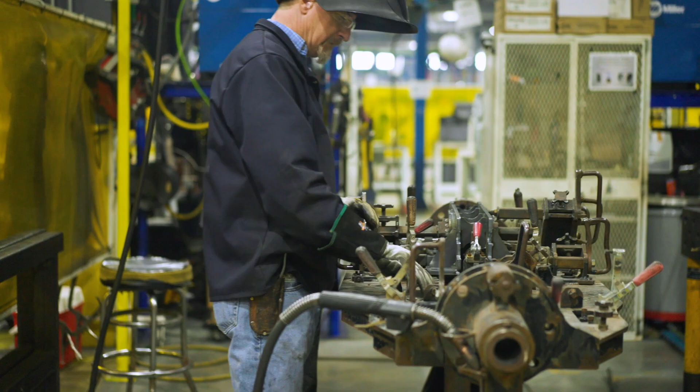A family name, a global brand, tough equipment, and at the center, people getting important work done. Welcome to Vermeer. Here, we design, build, and support industrial and agricultural machines equipping important work around the world.

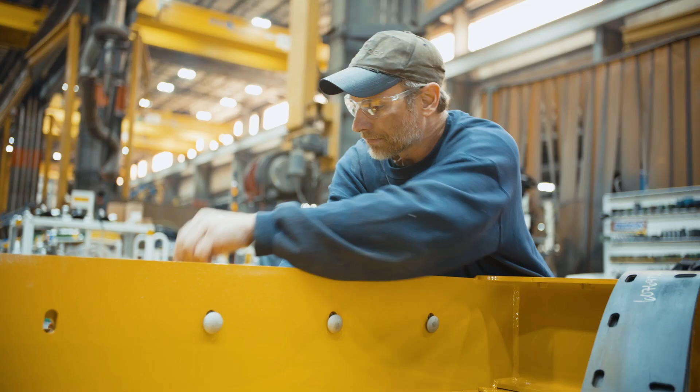This work takes a team of more than 4,000 worldwide, delivering tough yellow iron to a world striving to build better. Distributed through a global network of more than 600 independent dealer locations, our dealers deliver confidence to our customers, taking on job after job after job.

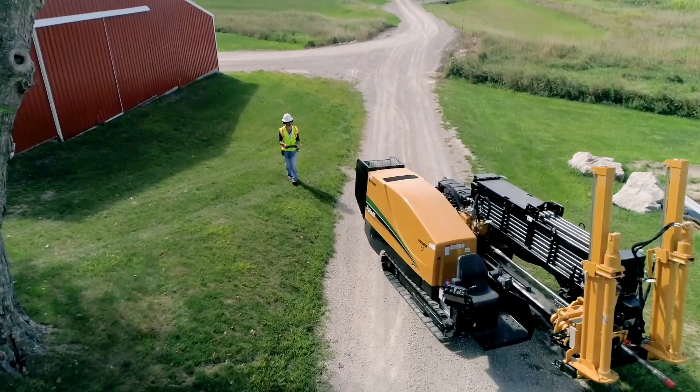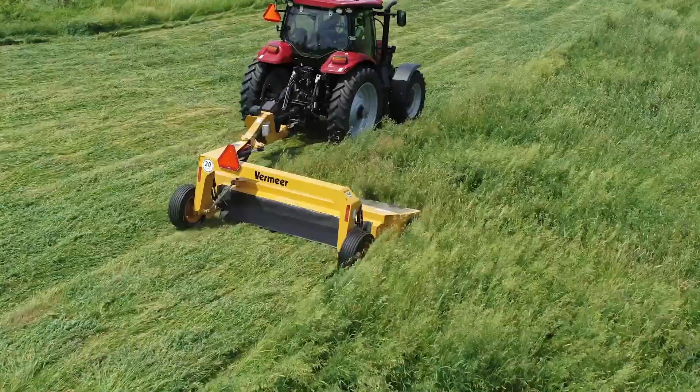And these jobs matter. Connecting people to the daily necessities of life, managing natural resources, and feeding and fueling communities. This is Vermeer, the result of decades of hard work, innovation, exploration, investment, and ultimately equipping others to do more.

It started in the 1940s. America entered World War II, and while the war took place overseas, back in America, farmers worked tirelessly in the fields with a depleted workforce, many of them still relying on horse-drawn implements and manual labor.

In his early 20s, Gary Vermeer worked on his family's farm. He was a tinkerer, an innovator, always looking for a better way. In 1943, Gary built a mechanical wagon hoist to eliminate the back-breaking work of unloading corn. Word spread quickly, and soon neighboring farmers wanted one of their own. And that's how it started.

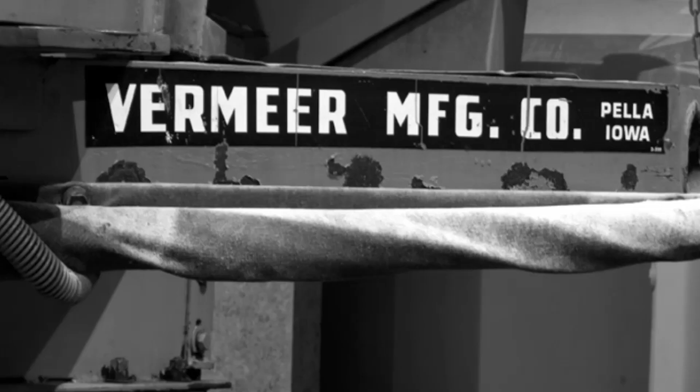Gary, alongside his cousin Ralph Vermeer, started Vermeer Manufacturing Company on November 22, 1948. Vermeer was now more than a name. It was problem-solving equipment, manufactured in a cinder block building on the edge of Gary's hometown in Pella, Iowa. Gary's brother Harry Vermeer would join in 1950.

The team was building more than equipment. They were building a brand that would become globally recognized for impacting lives around the world.

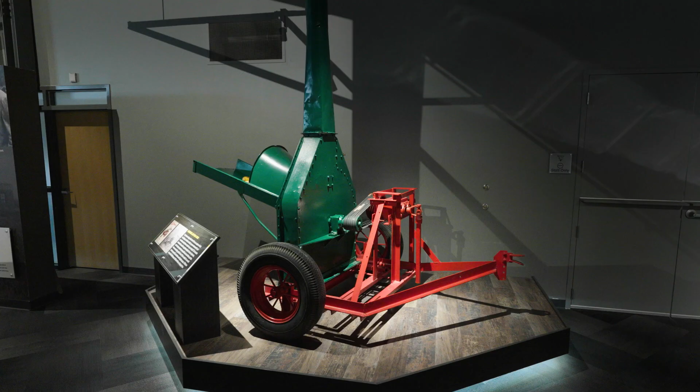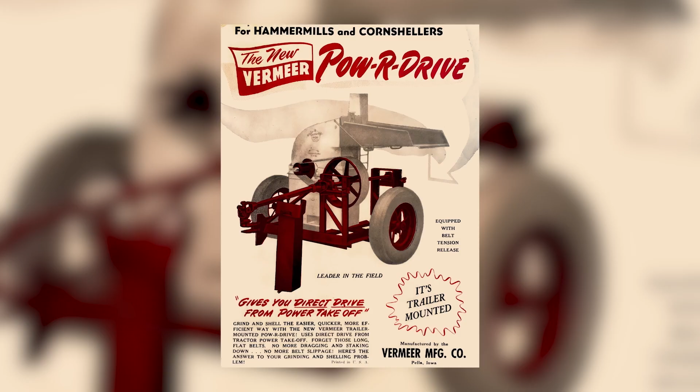The first commercial success for Vermeer came a year after its founding in 1949. The Pow-R-Drive used a system of belts connected to a tractor's power takeoff to run hammer mills and corn shellers. It helped make work on the farm easier.

And you know, I put a little ad in the Wallace's Farmer, and we had a little box in the post office, and they brought these inquiries out with the bushel baskets. We had 1,000 inquiries in 1 week, and I had one man working for me.

Gary's spirit of innovation and problem solving guided the company's success as the mantra became: find a need, fill that need, with a product built to last, and simply build the best.

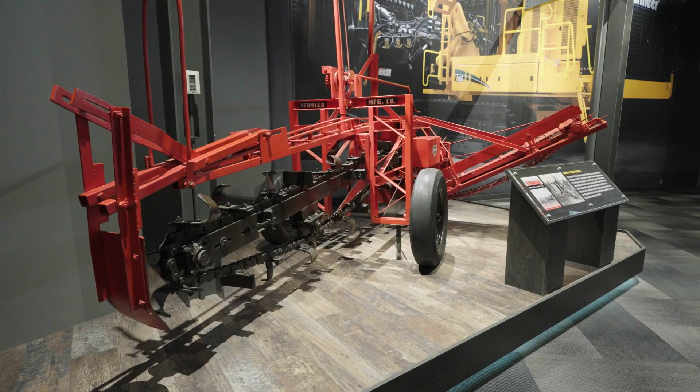Building on the success of the Power Hoist, Gary introduced Vermeer's first product in its infrastructure line in 1951. The problem? How to better install tile to drain low-lying farm fields too wet for crop production. The solution? A machine to dig the trench.

The Power Ditcher was a trencher powered by a tractor's PTO and made tile installation less labor-intensive, helping farmers get more done in their day.

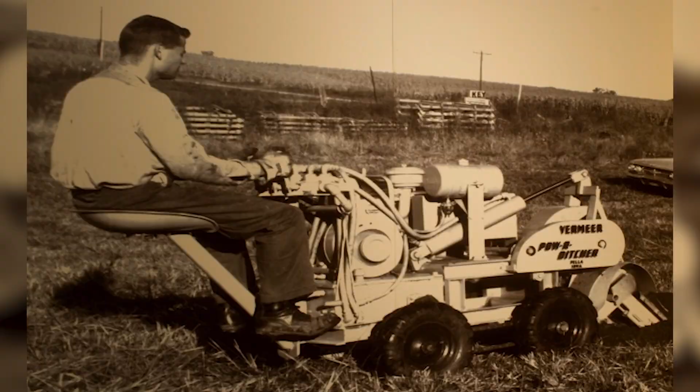From the original tiling trencher evolved self-propelled, track-mounted power ditchers for the underground utility market. And in the late 1950s, Vermeer began to export these trenching machines overseas. Vermeer was now a global brand.

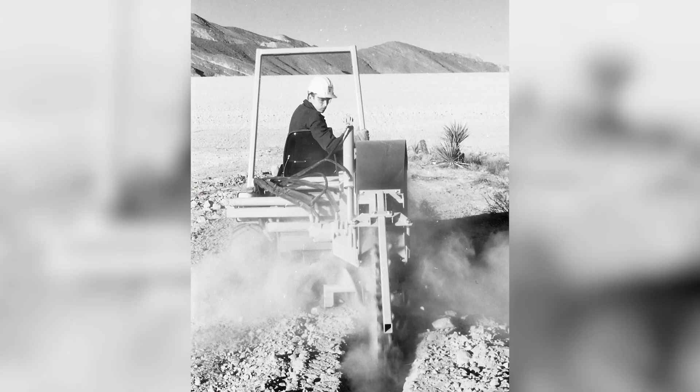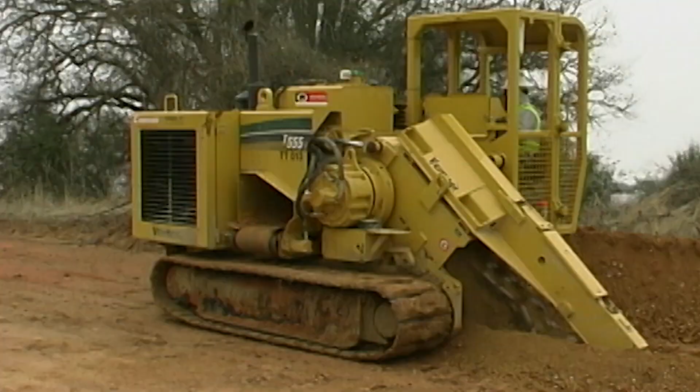And just like that, Vermeer was entrenched into infrastructure markets, innovating and manufacturing a long line of products dedicated to changing underground infrastructure around the world.

After 3 decades, this little company had grown to nearly 1,000 team members as other areas of the business grew as well, tripling in size just 2 decades after that.

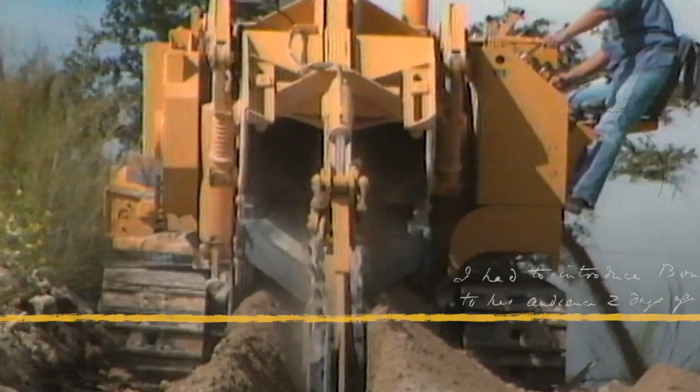By the 1980s, Vermeer tapped into the advancing technology of hydraulics, and a new line of trenchers were introduced. As jobs got bigger and tougher, so did the trenchers. Today, trenchers operate in ranges from backyard pedestrian use to large installations of fiber, gas, power, water, sewer, and under-drain installation.

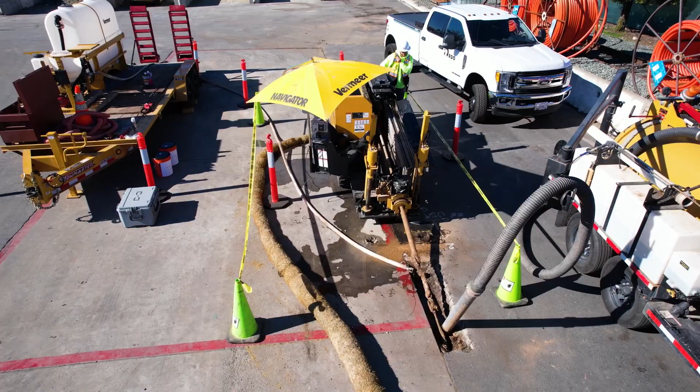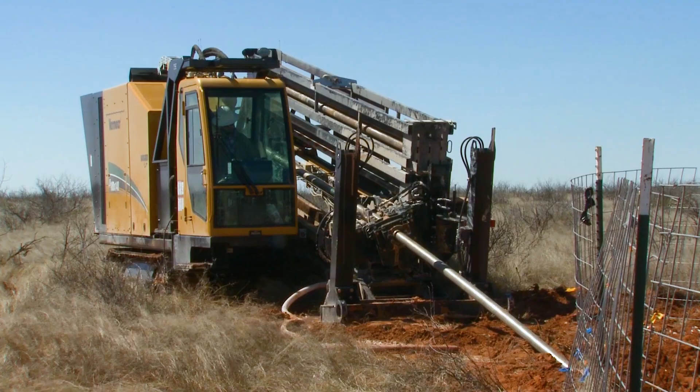In the 1990s, infrastructure installation was changing. The challenge? Install utilities with minimal disruption to existing infrastructure. The solution? Horizontal directional drilling, a technology that allows utilities to be installed underground, going under roads and even bodies of water to make necessary connections. As jobs got tougher, the drills got stronger.

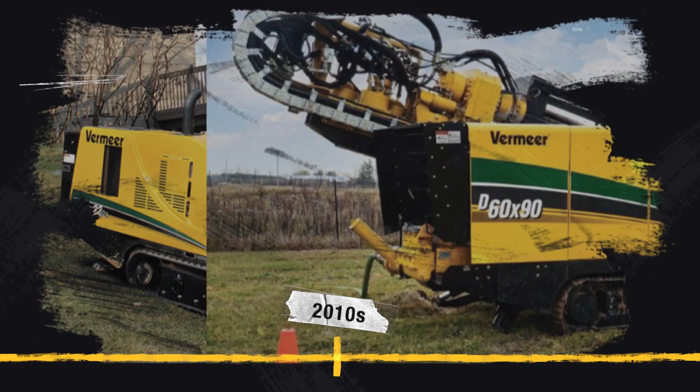Vermeer led the industry with innovations in its HDD lineup to make an impact on customers' productivity. Standardized controls, sound reduction, the ability to drill through rock, and power to footprint all help Vermeer customers take better care of the communities they work in.

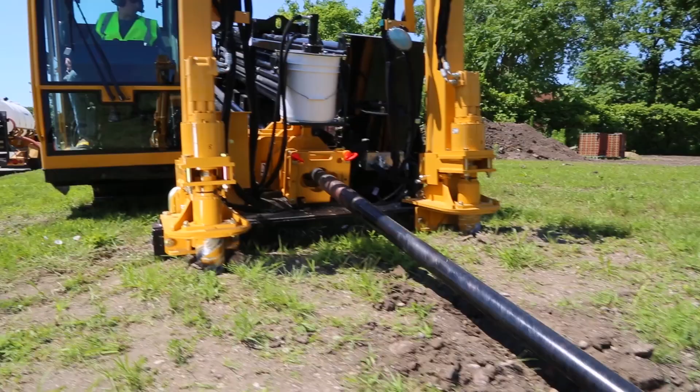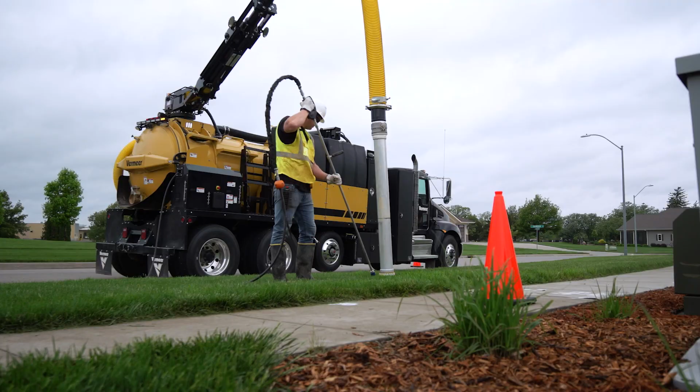And often on HDD job sites, vacuum excavation equipment can be seen partnered up to soft dig and visually verify the location of existing buried utilities, driving productive and responsible ways to go underground. Vermeer MV Solutions in South Carolina and Florida manufacture a long line of Vermeer truck and trailer mounted vacuum excavators, supplying a growing industry.

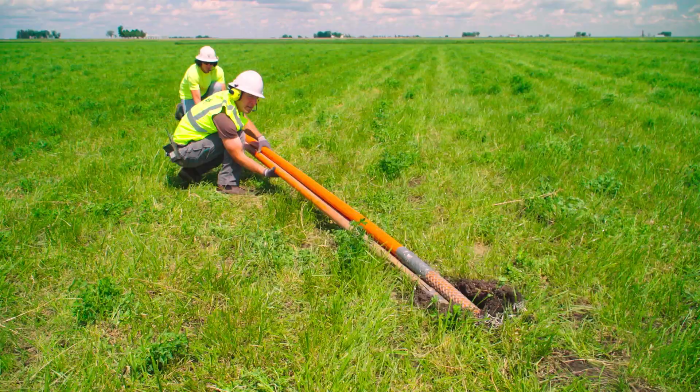Along with increased demand for underground work, so came demand for drill operators to run the machines. In 2015, Vermeer launched the HDD Circuit Training Program, the first accredited certificate course of its kind, providing a comprehensive HDD operator training program teaching efficiency and expertise.

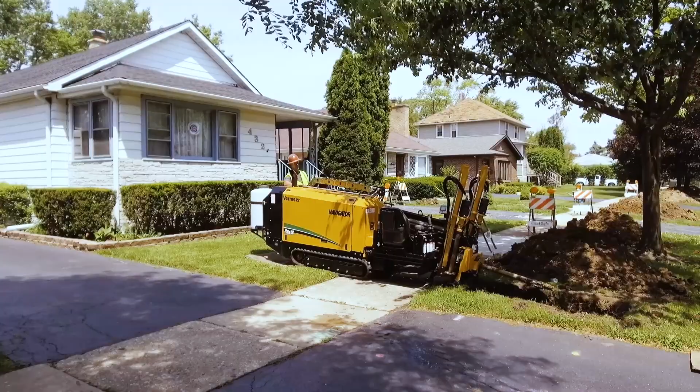Today, Vermeer helps deliver confidence to job sites around the world with equipment that connects people to water, power, gas, and high-speed internet, alongside technology that helps drive productivity.

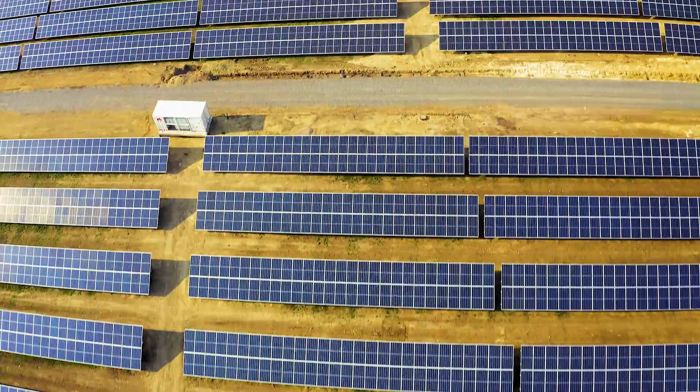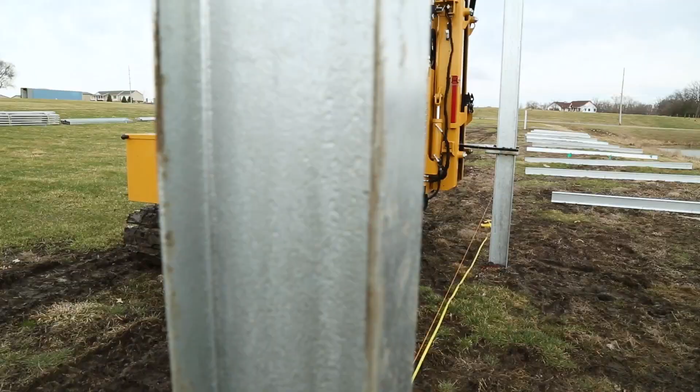While solar contractors were using Vermeer equipment to connect solar farms to utility grids, Vermeer saw an opportunity to add productivity to the job site. In 2011, Vermeer entered the renewable energy market with the launch of the PD10 pile driver, allowing customers to utilize the same local dealer support for their operations. Vermeer pile drivers meet the demands of solar contractors with different size models, automation features, and flexible operation, helping complete important work and manage natural resources.

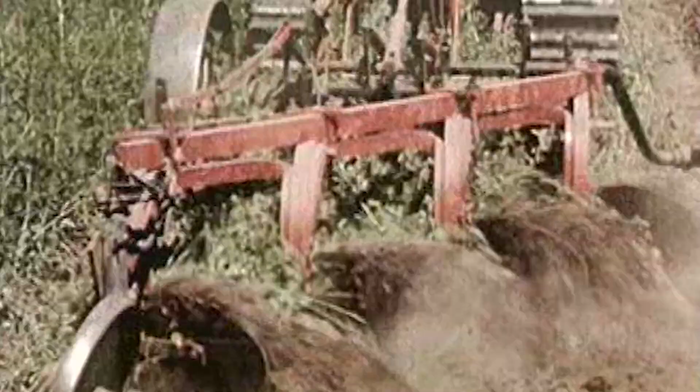Just as Vermeer's infrastructure line grew from a need on the farm, so did its environmental product line. In the late 1950s, Gary needed to clear trees from his fields for crop production. The challenge this time, a tree stump. There was really no way to take a stump out of the ground except with an axe and a spade. It was almost impossible. He found a better way.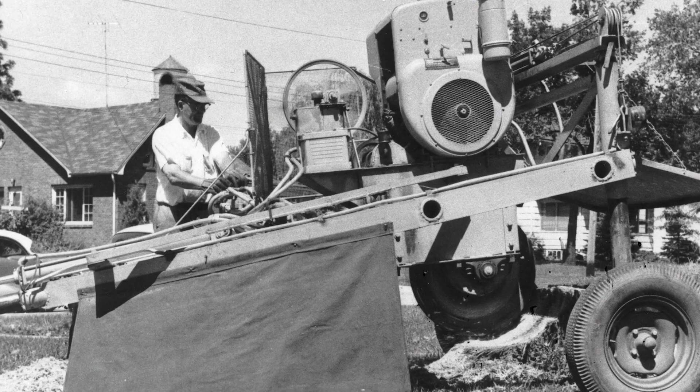Vermeer's stump cutter ushered the company into the environmental tree care market.

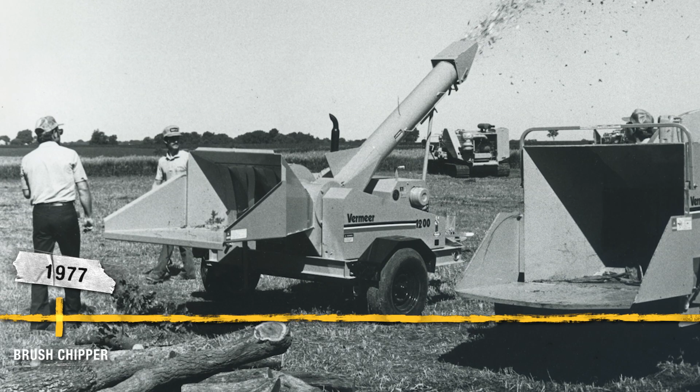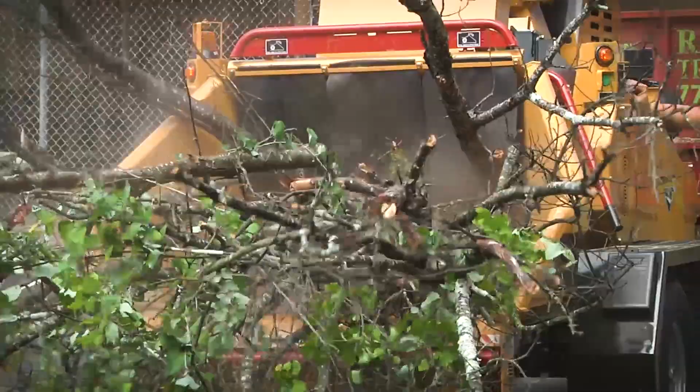Vermeer's success in the environmental market was just getting started when towns and cities needed a way to clear trees and brush in their communities. This led to the creation of Vermeer's first brush chipper in 1977. Then, by 1990, brush chippers were in high demand and became the best-selling product at Vermeer. As demand grew, different sizes of chippers helped tackle a variety of tough jobs. Larger limbs and thicker brush made it difficult for operators to load material by hand.

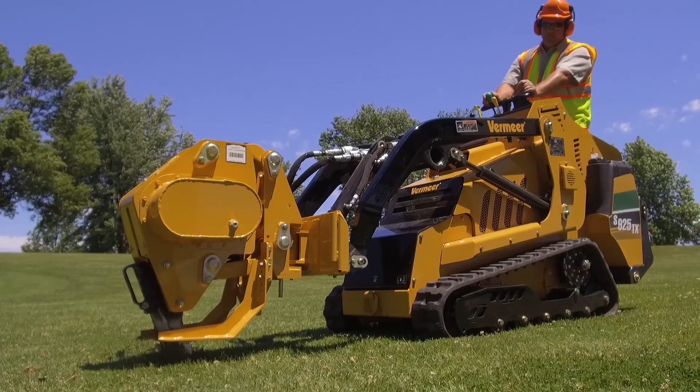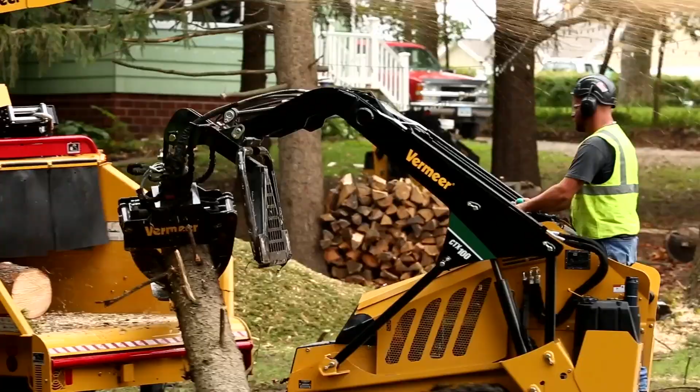This led engineers to rethink how the Vermeer skid steer, originally produced for construction markets, could better serve the tree care, rental, and landscape market customer. Today, many skid steers can be seen on job sites loading materials into brush chippers and serve as a versatile tool for many job sites, thanks to a wide variety of attachments.

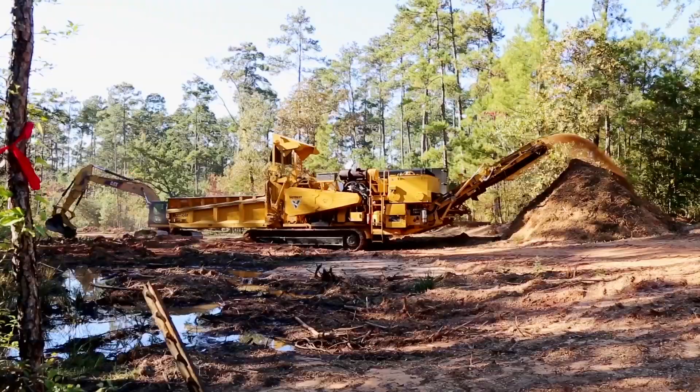Environmental-related work, such as storm cleanup, right-of-way clearing, and new regulations, laid the foundation for bigger work ahead.

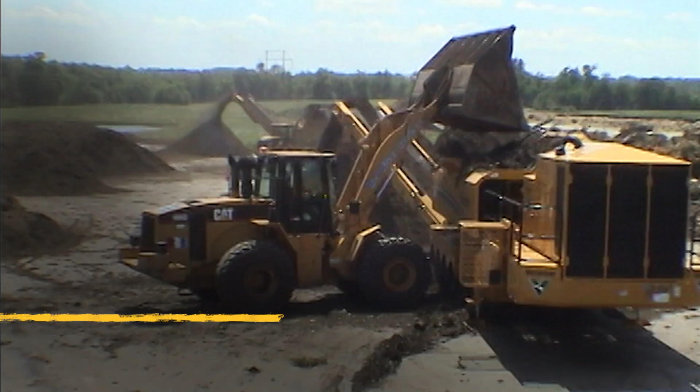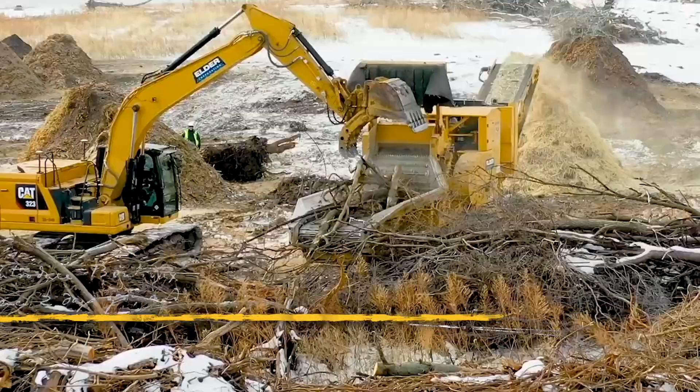Regulations in the 90s across North America left few options for tree care businesses to dispose of stumps and large diameter wood. Landfills began turning away wood waste, and local communities enacted burn bans. Tree care businesses turned to Vermeer for a solution. In 1994, a line of tub grinders was manufactured for high-volume material processing, but better ways were needed to handle even larger materials. So in 2002, the horizontal grinder was developed to help contractors dispose of whole trees and more efficiently manage waste.

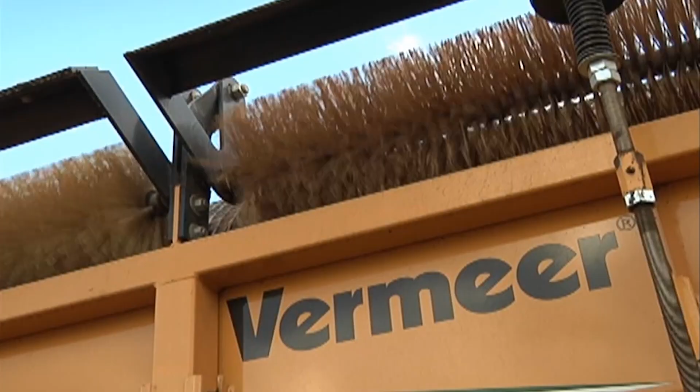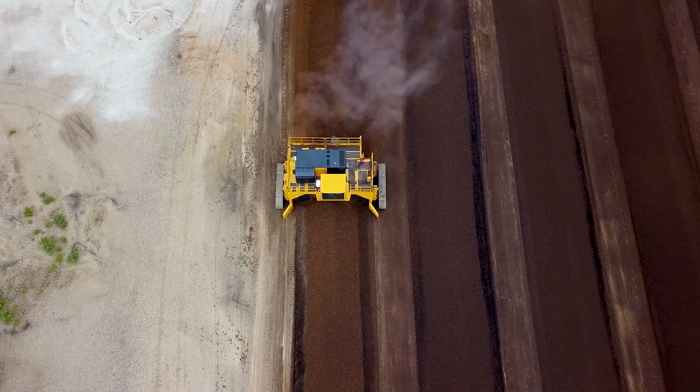And in some cases, turned back into energy as Vermeer supports the renewable energy markets with biomass. Acquisitions and product innovations cemented the presence of Vermeer in the recycling and forestry market. Today, trommel screens, whole tree chippers, horizontal and tub grinders, along with many industry-leading innovations, can be found on recycling and forestry job sites.

At the same time, Vermeer was finding more ways to help manage environmental resources. In the early 2000s, an Italian customer needed to mine minerals from an area where traditional methods of drilling and blasting would not work. The solution? A more controlled method of mining.

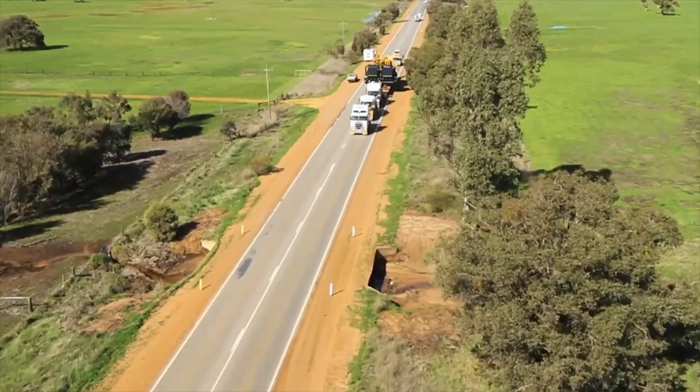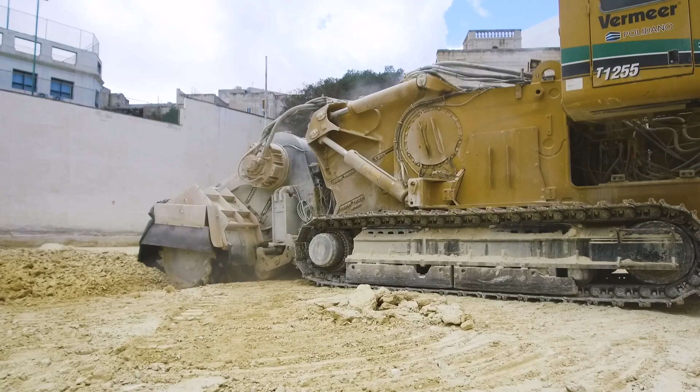Then, in 2011, Vermeer unveiled the T1255 Commander 3 terrain leveler surface excavation machine. It's the largest machine manufactured in Iowa then and still is today. Surface miners use high-precision excavation and are designed to work in tough ground conditions. They extract minerals needed for everything from iodine to aluminum and can be found in quarries, mines, and even cities.

By the 1970s, work on the farm was getting done, but some jobs were taking a toll on an aging generation. Farm implements helped make the work easier, but putting up hay was still a labor-intensive job.

Then, during an early morning walk between Gary and his friend, their conversation would lead to a transformation of the hay industry. His friend wanted out of raising cattle. The work was just too much. He said, 'I'm tired of putting up hay.' And I thought, if this fella who ought to be in the cattle business is tired of putting up hay, there ought to be a better way to do it.

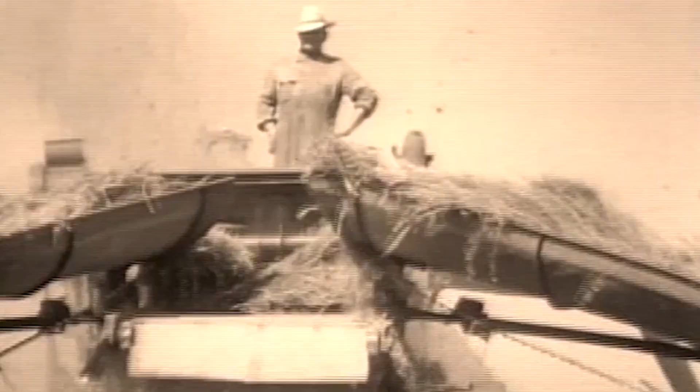So the next morning, I went to the experimental department, and we started figuring out how it would be to make a bale that would weigh a ton. And so then we started building that.

And then I went to 10 county seat towns in southern Iowa. You know, it's all cow-calf operation. They came out by the hundreds. Those cars would back up a mile on the road. And people would come in there because, boy, they were ready for something better as far as haying was concerned. So we made those demonstrations, and the next day you'd see a lot of the same people there again, and you'd say, 'Well, how come you came again?' 'We want to see if it works two days in a row,' they said.

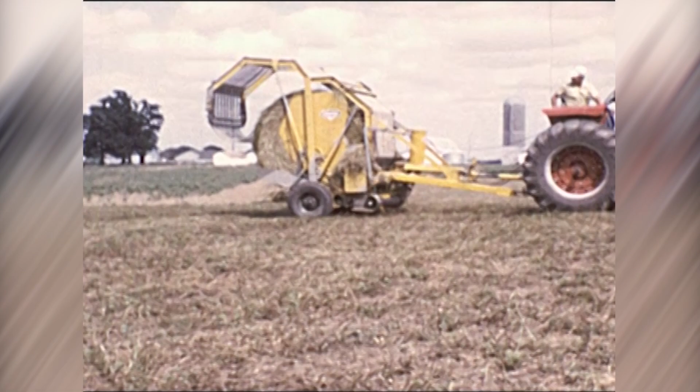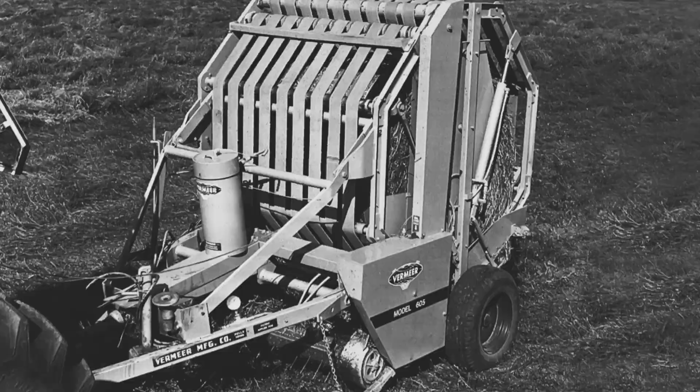Almost overnight, the large round hay baler revolutionized haymaking and Vermeer. The company doubled in size. Orders for balers stretched manufacturing production and capacity to the limit. Three new manufacturing plants were constructed in just nine years. Throughout the years, new balers were introduced with mechanical and technological improvements, helping meet the needs of customers with balers of different sizes and capabilities.

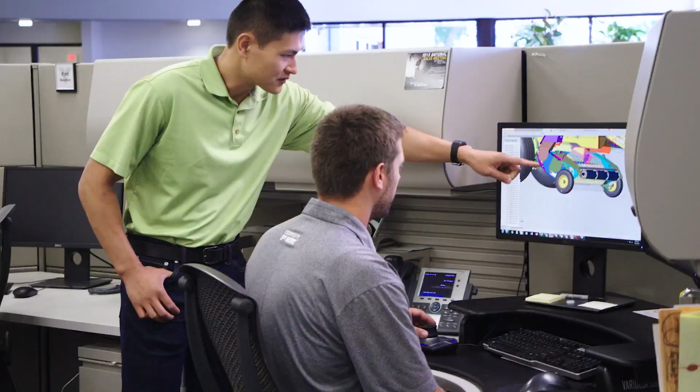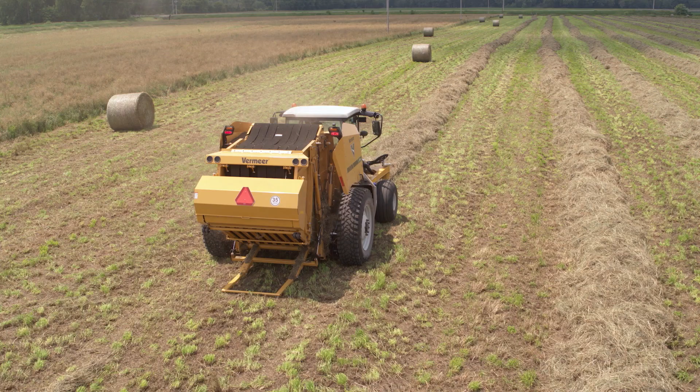Innovating didn't stop, however. Productivity and operator comfort continued to be a priority. In 2017, Vermeer launched the ZR5 1200 self-propelled baler, an all-in-one machine, efficiently moving through the field and comfortable for the operator. In 2021, CEO Jason Andringa commemorated 50 years of the round baler by using the ZR5 to successfully complete 50 bales in just 50 minutes.

And to do it on this land that has so much family history, going all the way back to the invention of the baler, is something I'll never forget, to be able to celebrate the 50th anniversary of the baler.

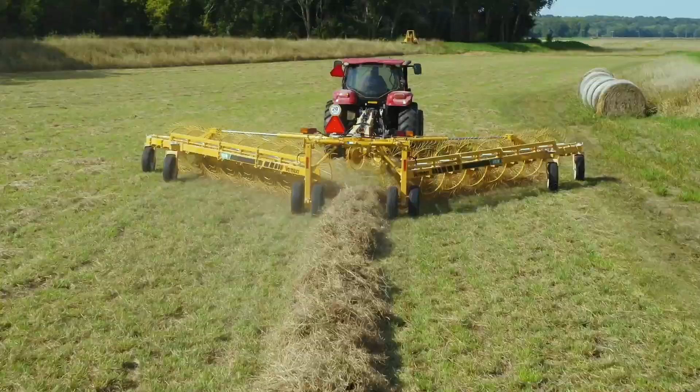Today, Vermeer continues to lead the forage industry with concepts like automated baling assistance technology on self-propelled balers and an autonomous bale mover. Vermeer forage solutions include a complete haymaking product lineup with mowers, rakes, tedders, bale wrappers, bale processors, vertical mixers, and feed wagons.

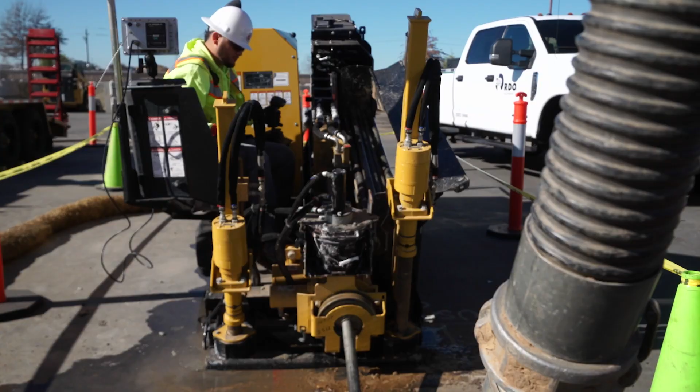Vermeer is a global brand today, following its humble beginnings on the farm. Customer loyalty grew thanks to the innovative products that help customers complete important work, and also because of the sales, parts, and service support delivered by a robust dealer network.

In the beginning, dealerships were started by Vermeer team members leaving Pella to establish territories. The first of these began in Findlay, Ohio in 1960, fanned out across the United States, and then around the world. Today, Vermeer has over 500 agricultural dealer locations and 200 industrial dealer locations, delivering confidence to customer job sites.

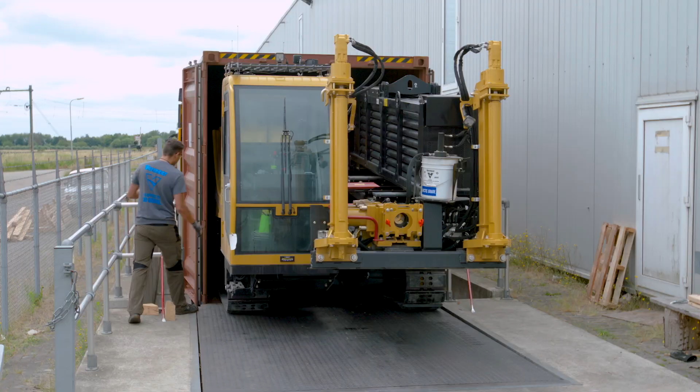Diverse products and markets require a diverse dealer network, demanding expertise that understands the culture and needs of the regions where customers live. To strengthen this localized support, Vermeer has manufacturing facilities and regional offices located in both domestic and international locations, strategically dotting the map.

Vermeer has evolved from a one-man shop into a globally recognized brand, owned and led by first, second, and now third-generation family members. Gary Vermeer believed in finding better ways, listening to ideas, and empowering curiosity. After founding the company, Gary remained CEO until 1989.

Gary's three children, Stan, Bob, and Mary, later joined their father in the family business: Stan from 1975 to 1986, Bob in 1974, and Mary in 1982. Bob and Mary's leadership in the 80s spearheaded the 4P philosophy of principles, people, product, and profit, a definition of the company's culture that still serves as the foundation for business decisions today.

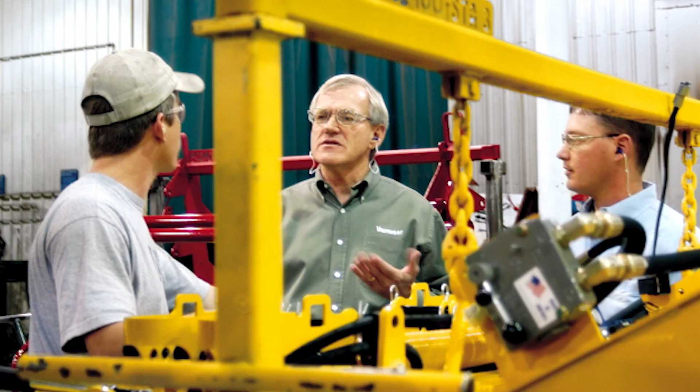Bob Vermeer, second-generation family member, took over as CEO in 1989, remaining in the role for the next 20 years. Bob's vibrant passion for people played an important role in creating a caring culture, demonstrating how to live it out in work, in life, and for others.

I always enjoyed the people part of the business and really love to see people grow in their positions. They're encouraged to improve themselves, find out where their giftedness is and what they can add to Vermeer. And I think that goes back to the 4P philosophy, and hopefully we have modeled that as a family for all the people who are here.

In 2003, Bob shared the CEO title with his sister, Mary Andringa. From 2003 through 2009, Bob and Mary guided the company based on the heritage of their father with a vision for the future.

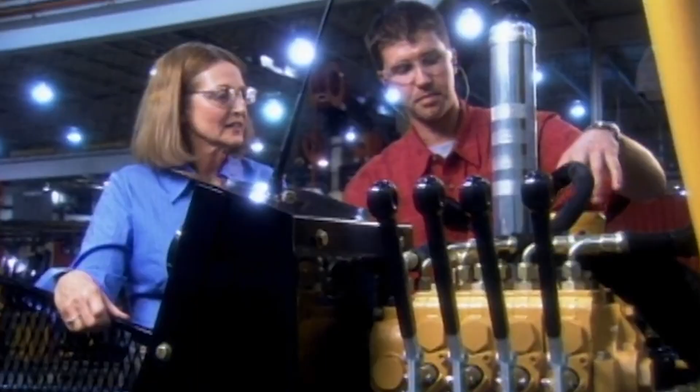Mary became the sole CEO in 2010 as Bob transitioned to chair of the board. Under Mary's leadership, Vermeer experienced increased productivity in the plants with the adoption of lean manufacturing methods, and emphasized workforce development by attracting young talent into the manufacturing industry.

Continuous improvement really is taking waste out of the system. We always want to leave the value added in the process, but there are so many things that are non-value added. And if you can reduce or eliminate those, that helps you be a lot more productive. And it has enabled us to be profitable, but also be able to reinvest back into the business.

Mary served as CEO from 2010 until 2015, when her son, Jason Andringa, took over. Following an intentional succession plan within the business, Jason was ready to continue Vermeer growth.

Of the 4 Ps, principles are at the center, treating other people like you would want to be treated yourself. And I think that's an incredibly important theme throughout Vermeer's history. I feel like my grandfather operated that way. My mother operated that way. Both my uncles operated that way. It's been part of our history for 75 years, and there is no way we will deviate from that at any point in the future.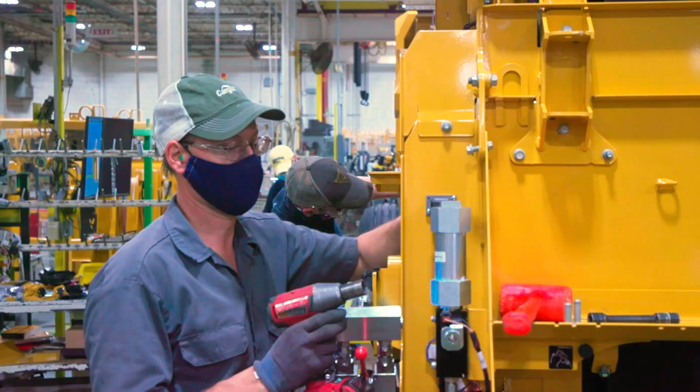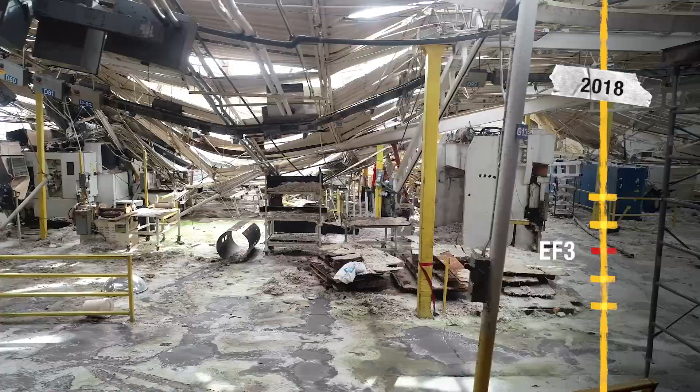Jason, a third-generation family member, has led Vermeer through some of the most successful and profitable years in company history, but has also experienced significant challenges too. In 2018, an EF3 tornado hit Vermeer headquarters in Pella, Iowa, causing major damage to plants 5 and 6. Fortunately, only minor injuries occurred, and everyone on campus was safe and accounted for.

With 400,000 square feet of manufacturing space demolished, Jason would lead the way. We are going to come back better and stronger than ever before, no doubt about it.

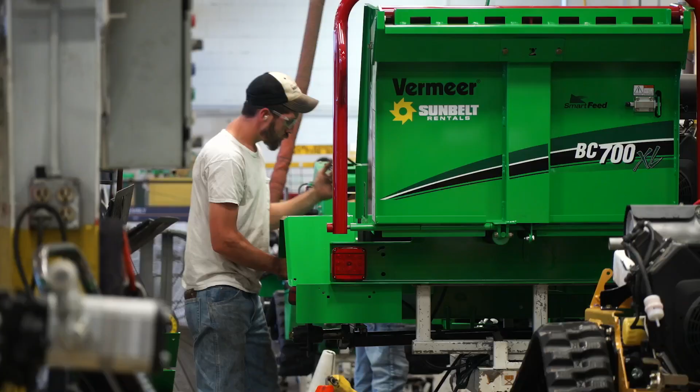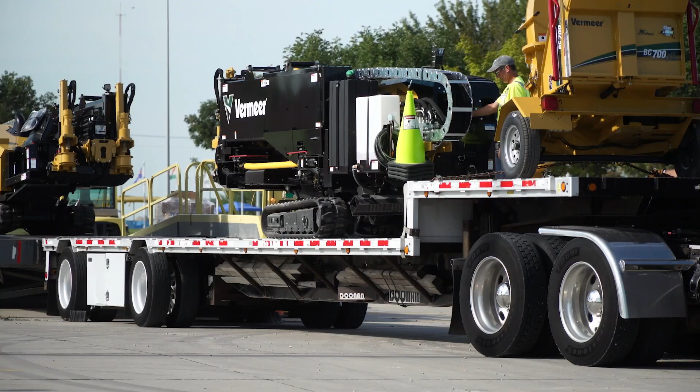Vermeer Strong became the rally cry, and the team proved to be exactly that. Strong, passionate, ready to rebuild for a better tomorrow. 30 days after the tornado, all team members were back to work and production was fully operational.

New construction began shortly after, and Shop 48, a building dedicated to innovation, opened in October 2019. The Eco Center, a hub to responsibly process waste, opened in February of 2020. And Plant 7, an all-new state-of-the-art manufacturing facility, opened in November of 2020.

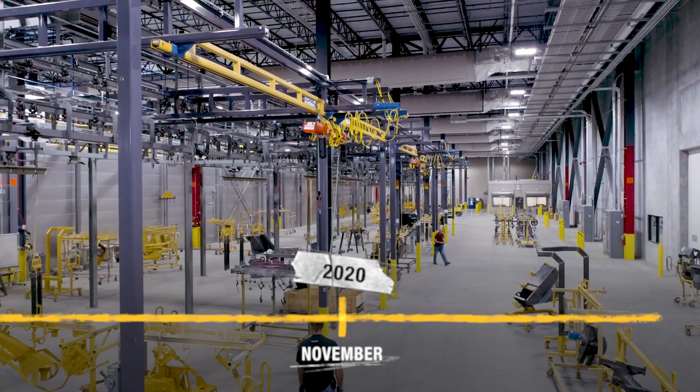Investments continued beyond tornado response efforts. Growth happened in South Carolina and in the Netherlands. In 2023, operations began in the new 300,000 square foot global parts distribution center, fulfilling orders for parts from dealers and customers.

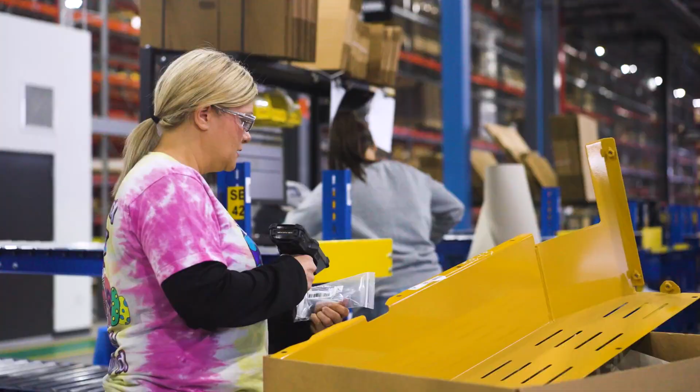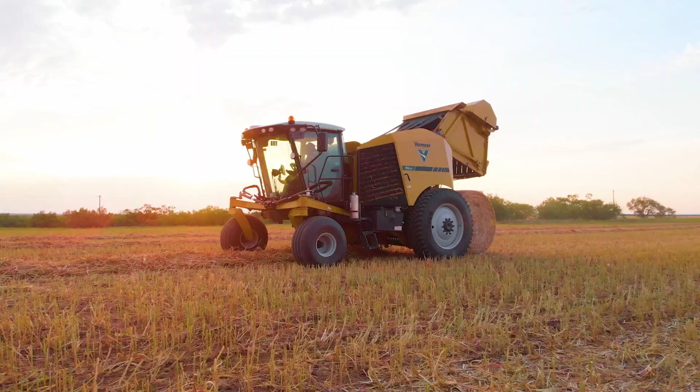Vermeer is equipping customers around the world with equipment and technology that delivers a productivity advantage, supported by a dealer network that delivers confidence. So at the end of the day, the important work of helping build a better world gets done. The Vermeer family is committed to this, with family members leading the business in key roles.

Mindy Vandenbosch, third-generation family member, serves as Vice President of Operations and oversees the production of Vermeer equipment.

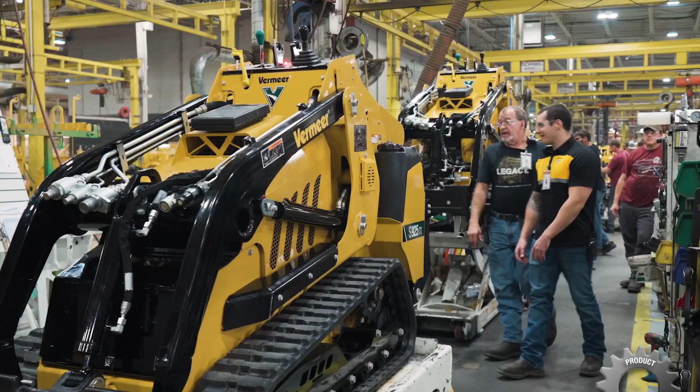At the end of the day, if we build good quality product, it just makes it easier on that dealer and that customer, because we're trying to fill a need for our customer so they can get the job done productively. And so that all rolls back into how we design it, how we engineer it, how we build it. And so that's where my team comes into place, is that we're going to build good quality product so our customers can run and get the job done that they need to do.

Alongside these two family members, the greater Vermeer family actively works to support the values that have driven Vermeer's success for decades.

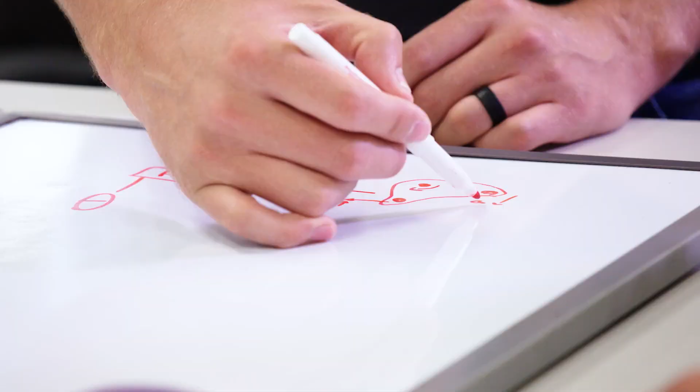For 75 years, our team, our dealers, our customers, and our communities, each doing the important work of equipping our world to do more. On the drawing board, on the shop floor, in the field, on the job site, every day, around the world. Vermeer is committed to the decades to come, equipped to do more, helping build a better world and a better future together.

I'm incredibly proud of the 75 years that brought us to this point, and yet I am thoroughly convinced that our best and brightest days are ahead of us.

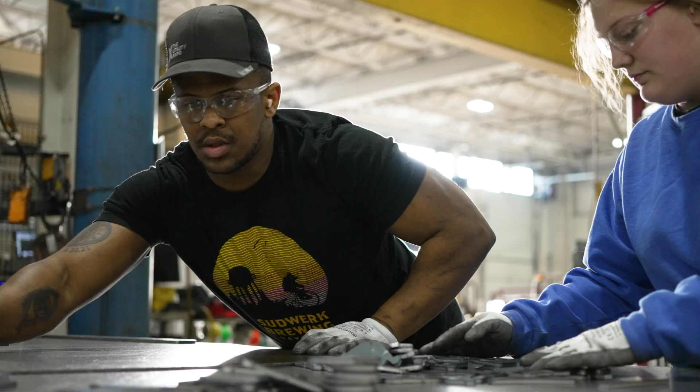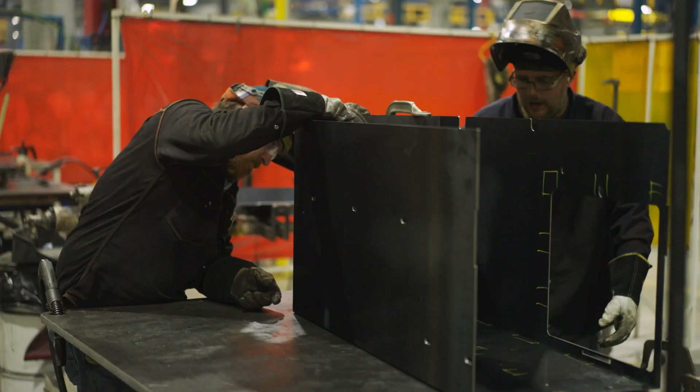We have 4,000 plus motivated team members that I'm very proud of, bringing unique skill sets and passions to their jobs so that we collectively can drive this company into the future that I think is incredibly favorable for Vermeer, our dealers, and our customers.

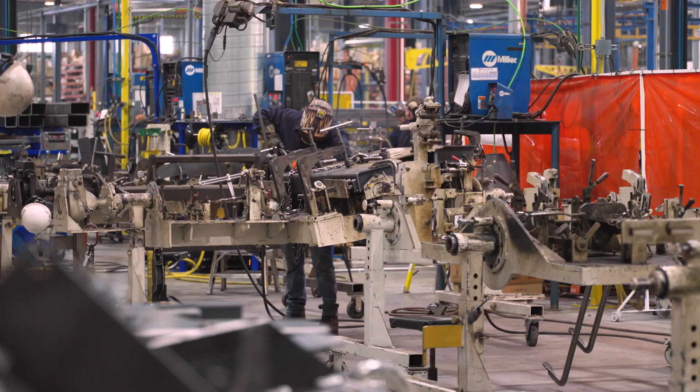I think 25 years from now, we're going to be amazed by what we've accomplished, and yet at the same time, what we see in front of us will be even more exciting.